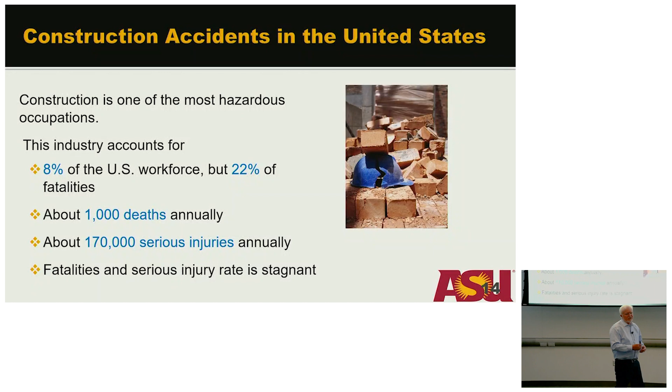Well, I think the helmet thing may help somewhat, but I think prevention through design is one of those things that can help significantly in improvement. So that's the reason we're talking here today.

I'm going to put safety through design, or prevention through design, into context. There are lots of safety practices, and you can see a number of things here: pre-task planning, job hazard analysis, and so on and so forth, and you can see prevention through design. Prevention through design really is a process that starts in the early planning phases and moves all the way through.

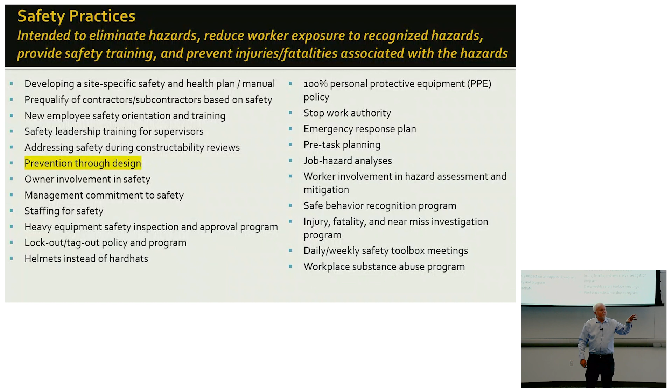It's not just designers, even though that's a critically important part of this, but it's also how we approach how we do our work. I would submit to you that prevention through design is an extremely important part of that, but we also have to have a safety culture, right?

So we've got safety practices, all these things that we do to try to protect our workers. And we have safety culture, which says that everyone on the job, from the CEOs all the way down and all the parties involved, everything that we do is focused on making sure that everyone goes home safe every night. That means a different focus of the organization—it's not, oh, we've got to make our schedule and cost, so just go out there and get the job done, doesn't matter how you do it.

We had a speaker 2 or 3 years ago when they were building the Mullett Arena over here. The speaker was from Mortenson, and he said, you know, we looked at building that arena, we looked at the practices and hazards, and then we designed the way we were going to do the work so we did not allow our construction workers to cheat. There was only one way to do things, and the right way was the safe way.

He gave an example of going out and finding ladders on your site, and some of the ladders are damaged. A damaged ladder on site might allow somebody to use it and fall. He said, we just take them off site. There's no way we're going to allow people to do things that are going to get them in trouble.

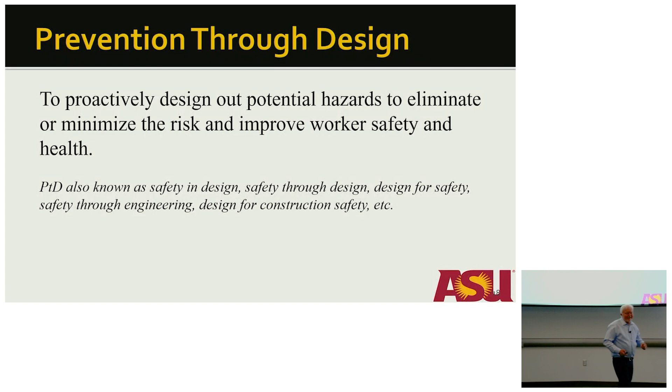Okay? Questions? Make sense? So this is the very beginning of the day, and we've got some other speakers here in a few moments. So what is PtD? PtD is looking at safety considerations and constructability—looking at safety considerations in the design process.

It's making those design decisions based on how they're going to impact our workers and also the maintenance of the facility. There are a couple of bad decisions made in this building here, from a prevention through design standpoint. One of them is the parapets on top of this building are not tall enough—they should be 42 inches because we have maintenance workers up there all the time.

I think they're 31 inches, so you can just flip over to the side. It's not too good when you fall 5 stories, so don't go walking around on the roof—but we do have maintenance workers up there. The second thing is, if you go out here in the atrium, and I pointed this out, the university said we don't want to spend the extra money.

If you look at the lights up there, some are LED lights, which is fine—they have a 20-year life. A lot of the lights are fluorescent, and if you go out there, half of them are out right now. So how do you change those lights that are out within 10 years of the life of the facility?

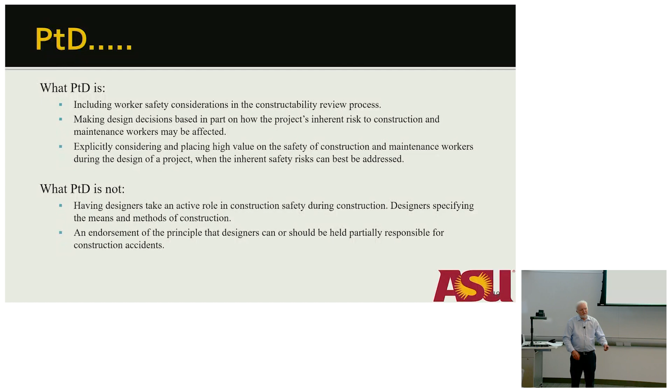To give you a little background, I know Mark will cover more. He was the guy, from what I understood, who designed rollover protection systems for the U.S. Army Corps of Engineers back in the 50s. So if you look at all the heavy equipment today that has these cages, that was him. The idea is that if something falls on you from above, or if you roll over and have your seatbelt on, you're probably going to be okay. So this guy really did a lot for our industry.

But at the end, when I talked to him—we went down and met with him a few years ago—his point is, let's take care of this up front. No reason to let it happen to us later on.

There's a lot of research out there linking accidents to design, but none of it is as broad as it could be. Every study has said, when we look at fatalities and accidents, many times those decisions made 2, 3, 5 years before can be linked directly to what happened—we made a mistake in our design. And it could be that it's made in the pre-construction phase.

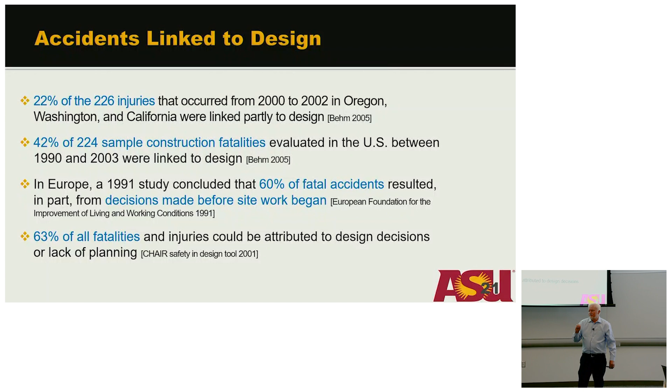Why didn't they put the porta potties on the other side of the road? There were all kinds of stupid decisions made by the contractor that put everybody on that site at risk. Usually you get away with it—that's the bad part. In this case, it destroyed this guy's life for the rest of his life. He was disabled. Accidents can be linked to the design of the facility, to the way we procure, the way we do all of our work, to our pre-construction planning, trying to look at the hazards on the site and design a way out of them.

Let me see if I can run this. We didn't try this ahead of time, but we'll go with it here. I might need some help here. Oh, okay, I was looking at that screen.

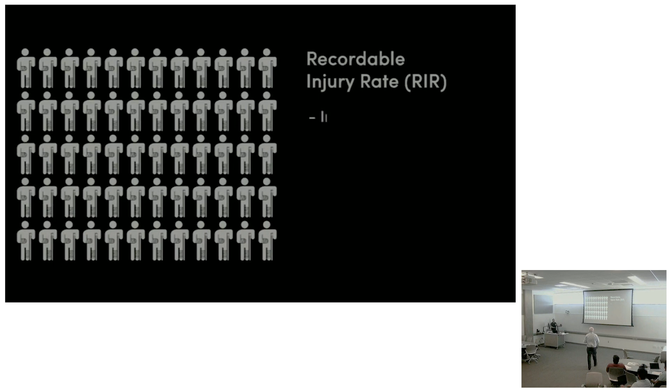We find that we have four times fewer injuries when we use prevention through design. Prevention through design is a philosophy and set of practices employed in the design of a facility to prevent accidents during installation and beyond. We collected data from five million man-hours of work to correlate our safety performance on various delivery methods. Our recordable injury rates decreased significantly when we prefabricate work. When we design the work and prefabricate it, our injuries are one-fifth of the national average. When we use lean design build, including prefabrication, our lost workday rate is about ten times better than the national average. Said another way, when we have an accident, it is significantly less serious than accidents on projects designed by other engineering companies where the work is stick-built.

Safety is everyone's responsibility—designers, fabricators, and installers. If we all buy into the importance of implementing a strong safety culture, the results can be truly outstanding. Safety is possible with a good attitude and a proven process starting early in design. I support prevention through design. It's what we do.

Victor Sanvido is a member of the National Academy of Construction. I think he's a friend of David's, and he's a senior VP at Southland. They buy into this stuff, and it makes a difference as we go—the design process, design build, making sure we're addressing safety, as well as our pre-construction activities. He talked about lean, IPD, and so on.

So what's the motivation? Well, I've already said it: decisions made during the design phase have an impact. By implementing these principles, we can reduce and improve the health and safety of our workforce. Maybe it's the type of paint we use, or the methods we use where we're putting workers into exposure to toxic chemicals. Perhaps it's exposure to dust, and so on. So we can figure out a way to do things that maybe aren't as toxic as they were.

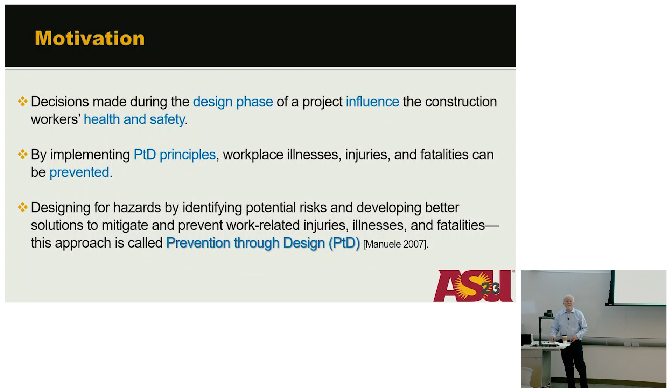Designing out and identifying these risks or hazards allows us, in many cases, to be more productive, because our workers don't have to be concerned about safety and are in a better position to get the work done.

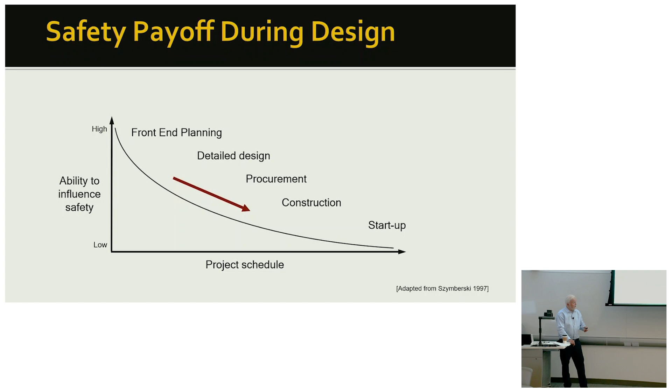We wear gloves so we don't get our hands cut, but maybe we figure out a better way of doing it so we don't get our hands exposed, right?

It's a last resort, but it's still a good resort, and it definitely saves injuries and lost time. Administrative controls, where we train people and do work scheduling, and try to get our craft workers away from each other, and so on.

We can do engineering controls, where we guard equipment so we don't have rotating equipment, or we keep people away from moving heavy equipment, and so those kind of things. Those are engineering controls that we can see as we go.

And then substitution, instead of us painting on site, we bring in pre-painted materials that have been painted in a controlled environment, so we're not exposed, right? That's a substitution. And then elimination is we just design it out.

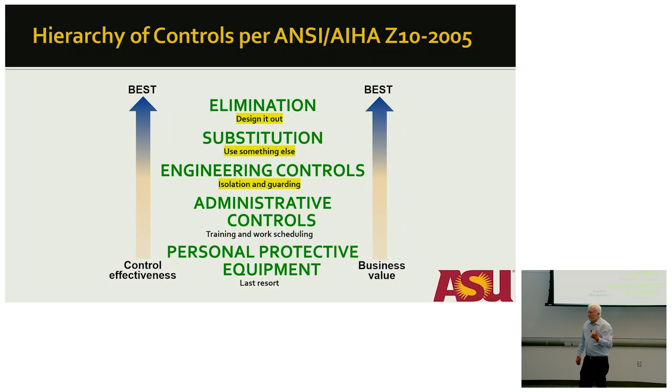So the hierarchy of control says that designing it out is the best if we can do it. Sometimes we can't. But the way to get to that point is we actually have to understand what the hazards are. That's one of the difficulties of prevention through design.

And what we've seen is that prevention through design also brings back productivity and financial benefits as we go. At some point, they're going to have to put scaffolding up here in the atrium. Wouldn't it have been nice to only done that every 20 years instead of every 10 years?

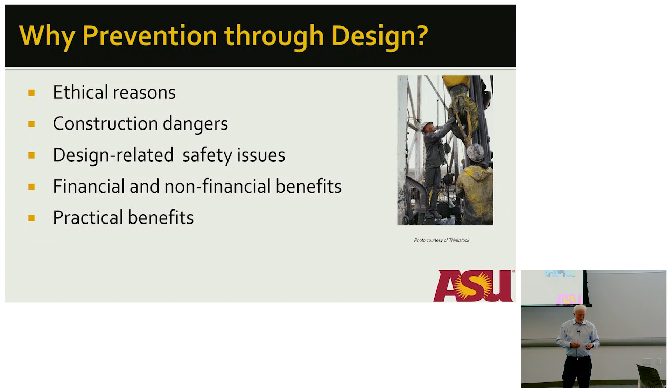Maybe so. And then there's some practical benefits, and I think that really gets down to people feeling safe or safer on their job as they move forward. All right, so let me give you another. I think I can handle it this time, Daniel.

Another one of my heroes about this is T.J. Lyons. He's no longer - he's retired from Gilbane now, but he's a real exciting. So prevention through design, great question.

It's a simple intervention as you design a project or a structure to eliminate risk. And most of it is engineering. Some of it is how you approach the work. And I'll give you two examples.

If you're going to replace a roof and replace the siding on a building, and you just run a scaffolding up one more tier past the top of the roof, you can no longer fall off the roof. So you don't have to worry about being tied off on the roof, right? The work is so much more efficient. You don't have to tell people, hey, connect your harness. And the trades love it because they don't have to wear the gear. That's simply preventing an incident by designing the work.

Related to that is, most people aren't aware of it, 3 to 4% of skylights in the United States will hold the weight of a person. It's nothing, right? No one knows that.

So if I'm an owner and I want to have - here's a good example. In our community, we had a boy and a girl go up on the roof of the school, jumped up on a skylight over the gymnasium, and she's dead. He'll never walk again. If they had designed that building, which we have the opportunity to do today, putting in a skylight you can't fall through - this has been developed overseas over the years. We have plenty of great examples that we can provide here in the U.S.

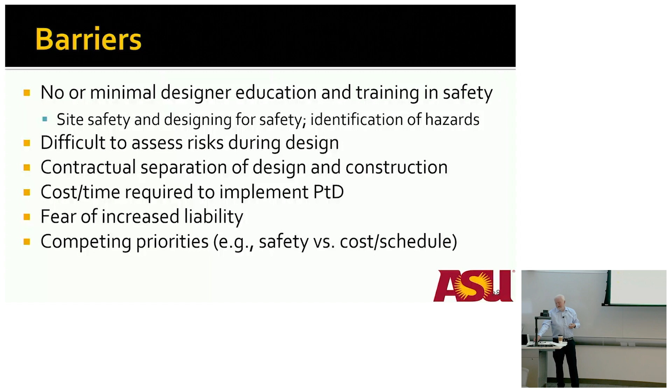That's really what happens. So there are some barriers. I think education is the number one barrier that we have here. And maybe lack of requirements to do it, and I'll talk about that a little bit later.

Why do I keep talking about maintaining the facility afterwards? Anybody have an idea? How long does construction take? How long did it take to build this building? It took 18 months. Okay, how long have we been in this building? Almost 10 years. How long are we going to be in this building? Probably another 40, at least.

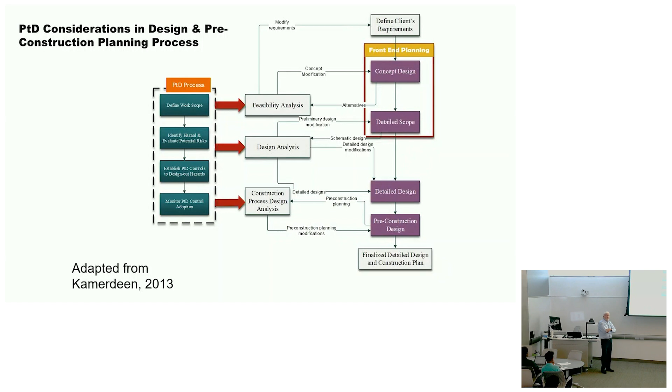They put stairwells in early, so they tried to stay away from ladders. You want to try to stay away from ladders as much as you can - they're dangerous. So try to have a ladder-free project if you can. It's not hard to do now with scissor lifts and with thinking about how we're going to set our job up. A lot of things we can do also are design decisions of how we're going to proceed with the construction.

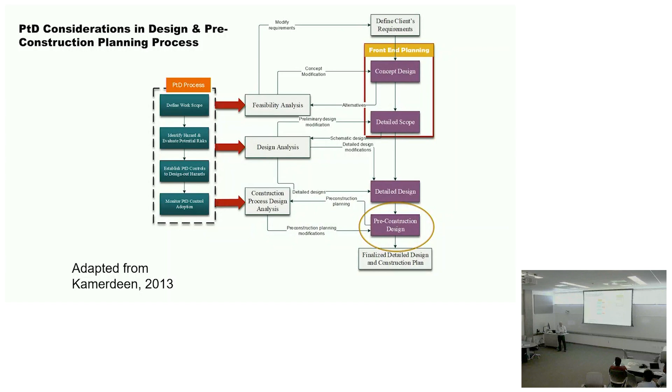So pre-construction - we've got a lot of construction folks here, we also have design folks. Here's how it lays out. I'm not going to read this, but it kind of talks about what we can do during each one of these phases. I think they'll have copies of this as we move forward.

You can kind of see here, and you see the term hazard. What's a hazard? Anybody? What is a hazard? Well, it's something that we consider that in certain circumstances can cause an incident. And it can cause an incident, and maybe it doesn't hurt anyone, maybe it's damage to equipment or damage to materials, and many times hazards are just laying there.

So if the light bulb went out on this light, here's my ladder. Anybody want me to step up on this right now? Why not? It has rollers, so it's kind of hazardous, right? I mean, if you think about it that way, but it's in this room all the time.

Well, most people probably are smart enough not to do that. Have you ever seen anybody standing on top of a chair like this? You haven't? I have. When I taught my class, I got up in the chair just to show how it was, but I had somebody holding it. So what was the intervention? I said, that's really a bad decision - why don't I go get a ladder as we do this?

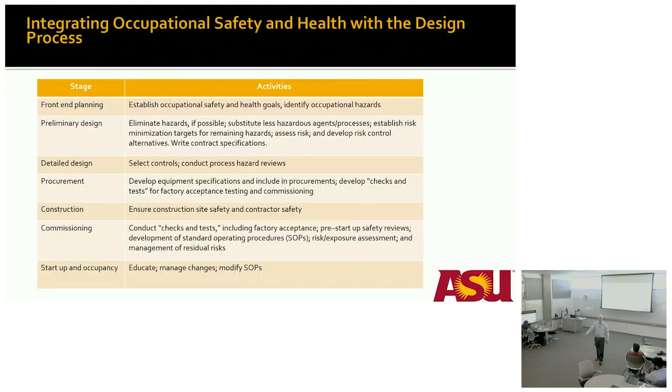So a hazard's something out there. If we're using hand tools, there's a potential hazard of using hand tools. If we're climbing a ladder, there's a potential hazard. As long as the ladder's laying on the ground, there's no hazard - it hasn't been activated yet. Once it gets up there, then somebody can get on that ladder and fall off of it, right?

On this job, it went through 2 summers, and I was out here in July, and it was 115 degrees. Is that a hazard? Well, the heat is the hazard. So they went to work starting at 3 o'clock in the morning. They changed their work processes to try to address that. Everything we do should consider the hazards that are there.

The project I talked to you about earlier with the high-lifter, the JLG high lifter, great piece of equipment, but the operator can't see very well when they're operating it. You just about have to have it for a lot of construction. So we know it's a hazard to get run over by a 30,000-pound machine. Let's make sure we design a process so that doesn't happen to somebody. It basically took all the skin off the guy's leg when it ran over him. It was a terrible accident. He broke a whole bunch of bones and was in intensive care for weeks.

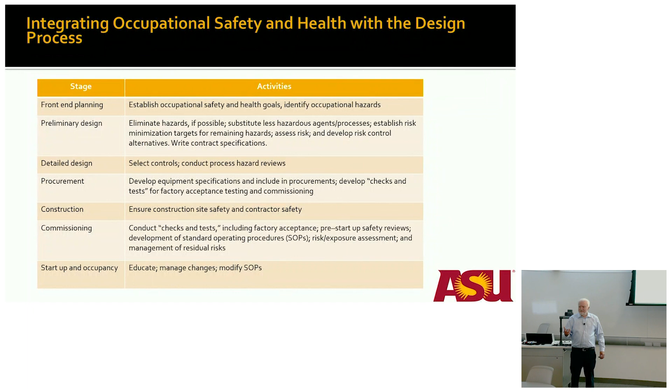Let's think. Let's design. A lot of construction, people say we don't do design. Yes, you do. You do design every day, because you have to take what the designer thought could be built and figure out how to build it. That's the design process. So think about how to build it in a safe manner, so that the only way you can build it is the safe way.

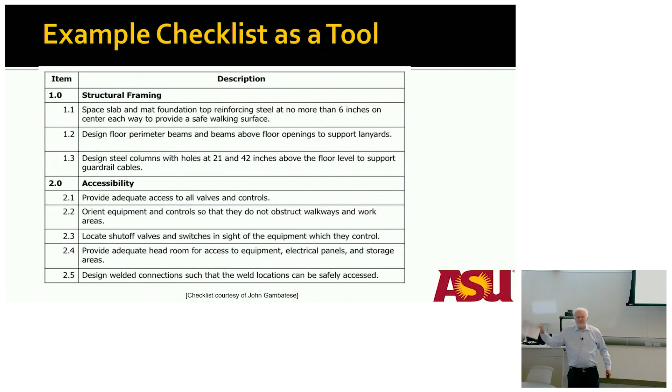So checklists are nice. We'll send this out to you. There's a checklist here, actually from an Engineering News Record article about a project that had 120 plus prevention-through-design ideas that were implemented. Erland Construction Company did this, so it's a really interesting discussion. They use checklists - there are lots of them out there online, you can get these.

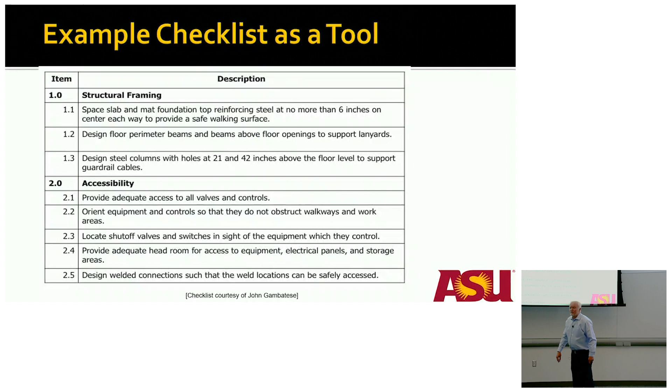Let me see if I can find this one. Item 1.3: design steel columns with holes at 21 and 42 inches above floor level to support guardrail cables. Why would you do that? Well, if they're on the outside perimeter of your building, you run cables through those and tie them down, and you don't have to have tie-off protection at that point.

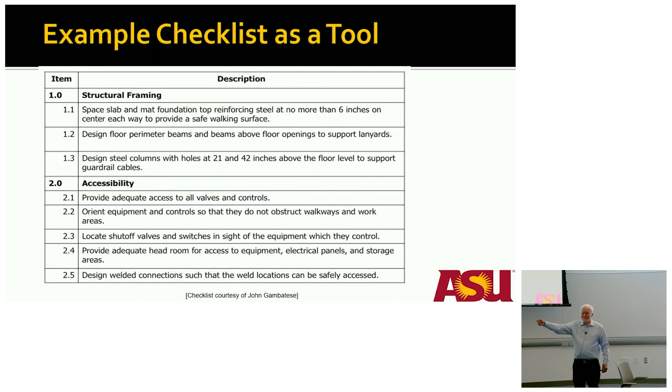You've got a guardrail on the outside, but a lot of people also embed - let's see if that's on here too - tie-off points that are welded onto the columns. So you just click on when you're up there with your fall protection on, you don't have to go looking for something, you just click and you're tied into the column. How much does that cost? Not much at all to do that. But we need to be thinking as we do this.

Okay, and then I've got this little thing here, and then we'll almost be done. Let me see if I can pull it up. I like this, I've shown it a number of times for classes.

And I don't like Cox, so anyway.

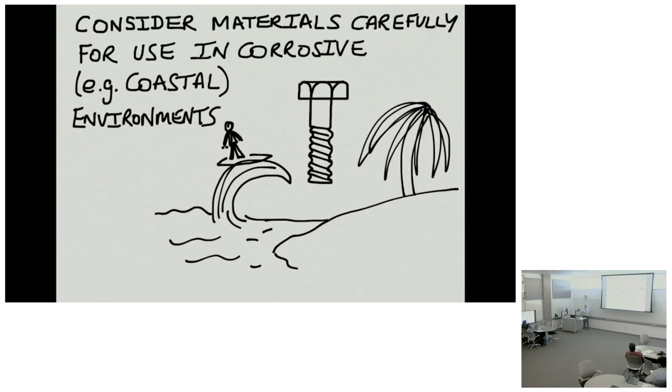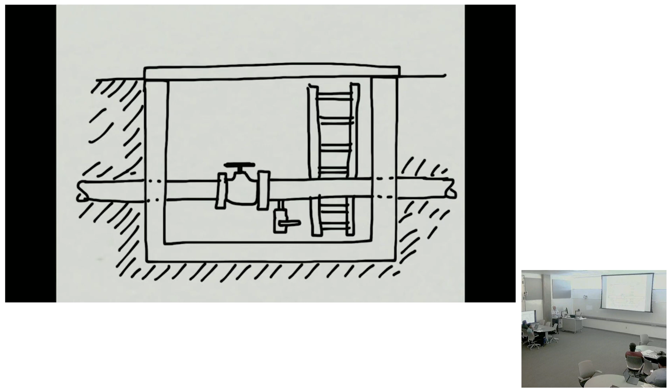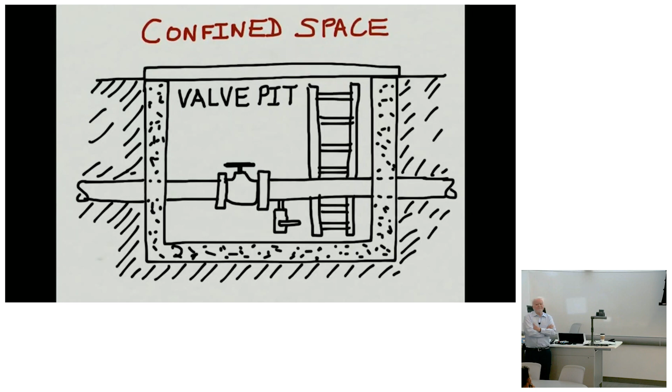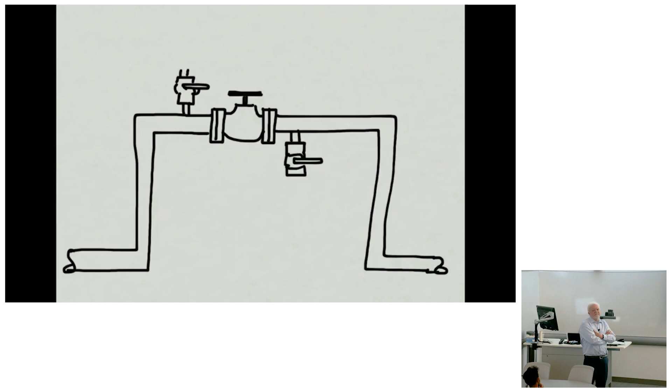We've had several confined space deaths here in Phoenix over the last 5 years. Workers go down in there and because of toxic fumes pass out and die.

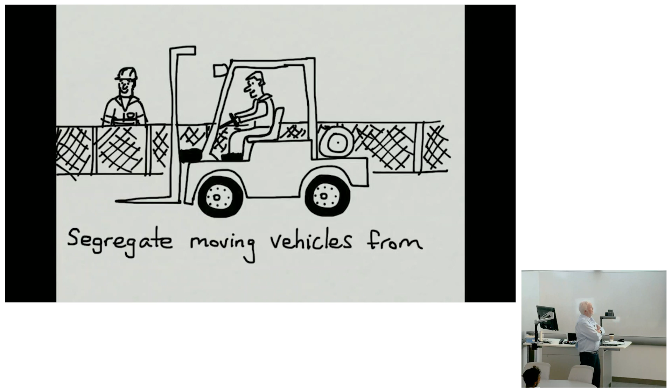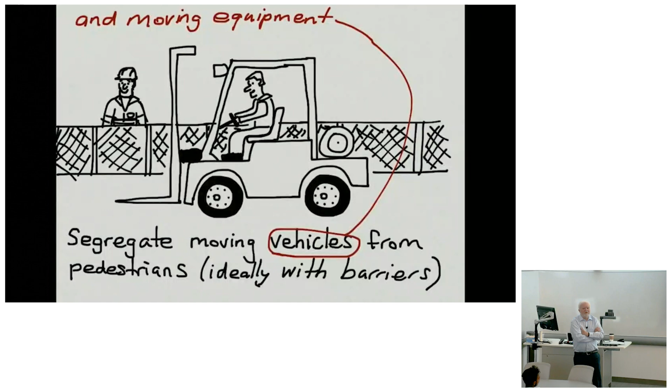On this job, there were still active power lines behind the building. So when they started, they ended up having to lift over that. They had somebody out there guarding with a whistle, making sure people weren't under that and that they were safely working around those power lines.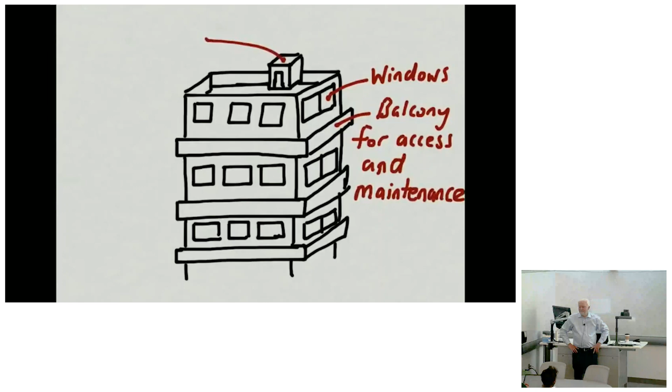We do that. We do have that.

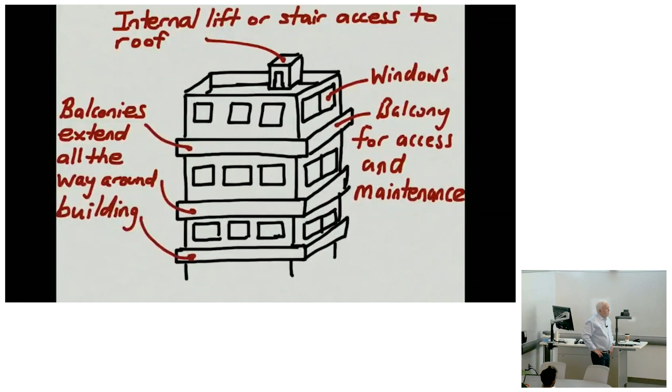Putting parapets on roofs is in the Bible. You can find it.

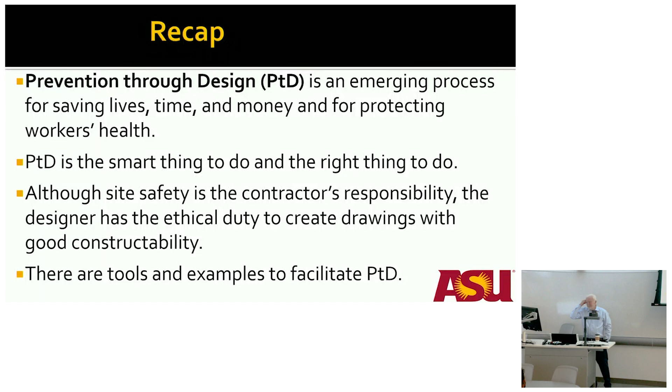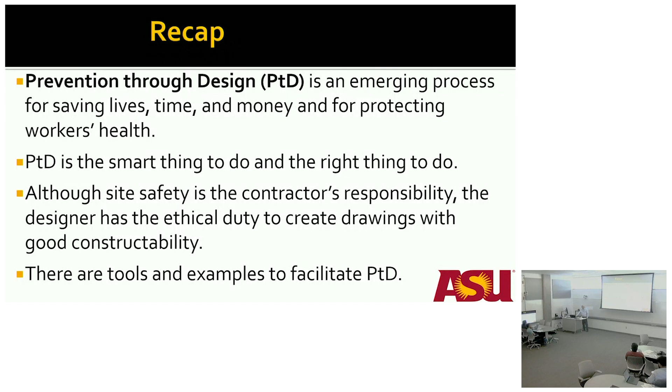Usually site safety is a contractor's responsibility, and certainly pre-construction we can do a lot of stuff, but some things just can't be controlled if they're already designed into the process. And there are a lot of places where you can get help with doing that.

One other thing I'll say is that there's no legislation requiring this in the United States. I think David talked about this before. In the UK, there's the CDM, Construction Design and Management, which was passed in, I think, 1997 or 1998. It requires a prevention through design consultant on every project above a certain amount of money, and also every public project. And in the UK, if somebody dies on your construction site, you can go to jail. That's another little thing about it. In Australia, they passed similar laws in 2012.

In the UK, their fatality rate per 100,000 workers is one-fifth of the US. In Australia, it's one-fourth. Not all of that is because of prevention through design—some of it's safety culture and the way things are pursued. But when you think about it, if we could save 800 workers' deaths in the United States, would it be worth doing this? I think it would be. I think it would be. So I'll just throw that out.

We've got some presentations to that effect in the material that David will provide you, so there are a lot of benefits. I think I have run out of time, but do I have time for a couple of questions? Yes, sir. Okay, so give me a question. What kind of questions? I've got a couple of general questions up here, and if you have a question, happy to provide that. Anybody?